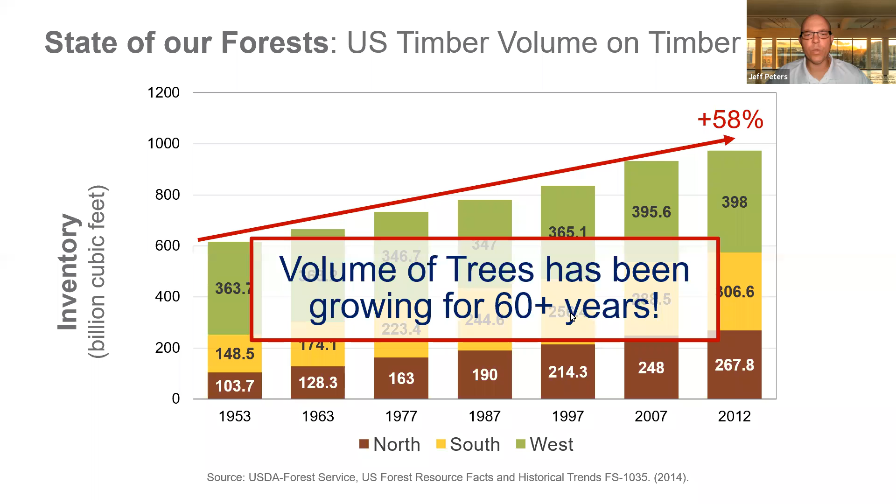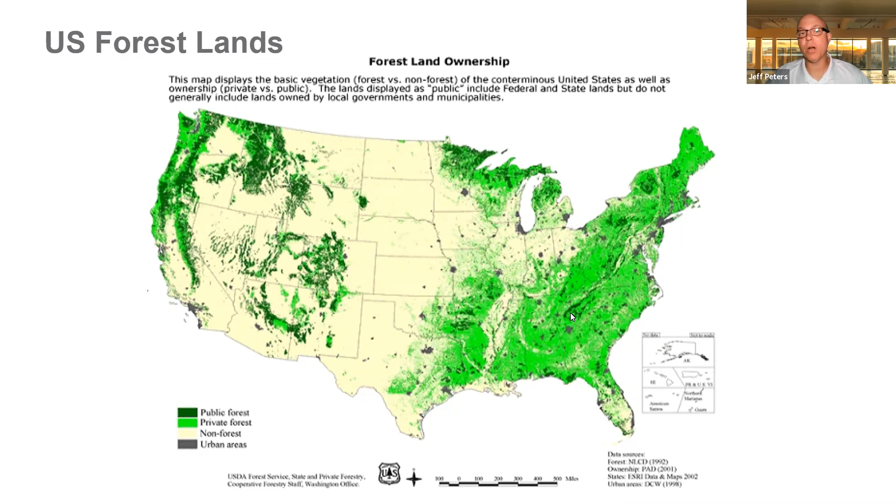Taking a closer look at the previous slide, private land ownership accounts for about 56% of our total forest land. Out of that 56%, there are more than 10 million individuals and family forest landowners that make up 42% of the total privately owned forest land. The other 14% of privately owned forest land is owned by corporations or partnerships and tribes.

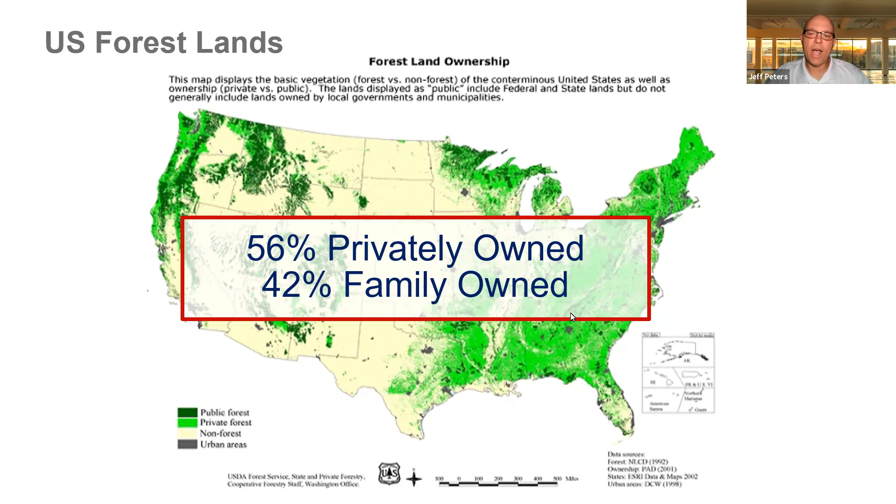So what motivates these private landowners to keep forests on their land? What is really motivating them to do that? It's really very simple and clear: the economic value of forest products is certainly a major factor to many of these private landowners. The more economic incentive that we can create for sustainable forestry, the better.

There is this saying in the world of timber: a forest that pays is a forest that stays. I understand that may be an oversimplification of what is really happening, but it really does illustrate the simple truth: a forest's survival really depends, in most cases, on its value to the local community and the landowner.

I want to take this opportunity to clear up a very common misunderstanding about forestry. There is a tremendous misconception that when a landowner decides to cut several acres of forest land to harvest trees they've been growing and managing for the last 12 or 15 years, people start to believe that's considered deforestation, because you're cutting down all the trees. That really couldn't be further from the truth.

So to better understand it, let's first define it. Deforestation is really the permanent removal of forests where the land is converted to other uses. The key term there is it's permanent—that's when we have deforestation, when the land has been repurposed for something else and there's no intent ever of regrowing any type of timber on that land.

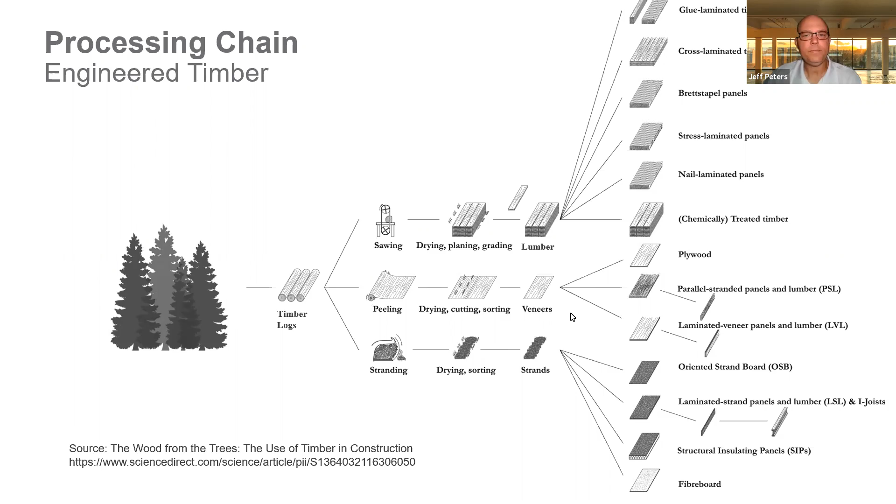And remember, all these wood products have carbon stored in them for their lifetime.

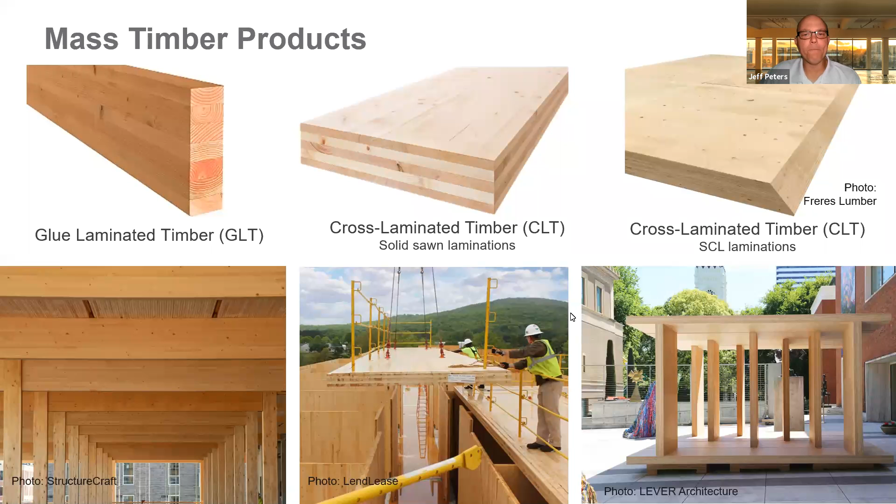Let's review some of the most common mass timber products. I'm going to be talking quite a bit about mass timber today, so I'll spend some time explaining these products. If you've seen some of the other presentations WoodWorks has done, this slide and the next two will be familiar to you. But these really just give you an idea about the volume of timber and the applications in which they can be used.

Of course, GLT or glue laminated timber, glue lams, are some of our most common, oldest traditional engineered wood products, used for post and beam frame structures.

Then we move on to cross laminated timber, or CLT, which particularly highlights solid sawn lumber. The image right next to it is a structural composite CLT—they use structural composite laminations or wood veneers to make mass plywood panels. The two are very similar; the only difference is one uses dimensional lumber and one uses veneers.

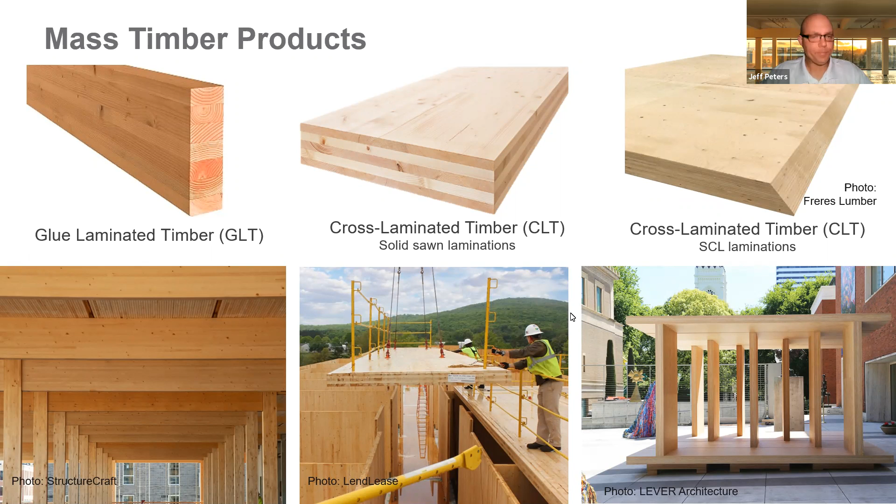Moving on, we have dowel laminated timber, or DLT. That one uses dimensional lumber, a softwood base material, and a hardwood dowel that's drilled through and injected into the base material. That hardwood dowel has a moisture concentration lower than the base material, and over time it wicks moisture from the base material, expands, and mechanically locks everything into place.

So you have a completely green product—pretty impressive. Nail laminated timber, or NLT, uses just dimensional lumber face-nailed to each other to create large panel products. And lastly, heavy timber lumber decking works really well in a mass timber or even just a heavy timber project. There could be opportunities where lumber decking is chosen over a mass plywood panel or CLT panel, and it still provides a beautiful aesthetic to your building.

So lumber decking is another option you can consider as well, if for some reason CLT, DLT, or NLT is not the right product for your project.

Here we see large prefabricated mass timber panels being lifted and set into place with a very small construction crew. These panels range from 8 to 11 feet in width and up to 40 to 60 feet in length. It really is a function of what manufacturer you choose—they all have different fabrication capacities. With advancements in fastener technology, these panels can be lifted into place and secured quickly with long self-tapping screws, very, very fast.

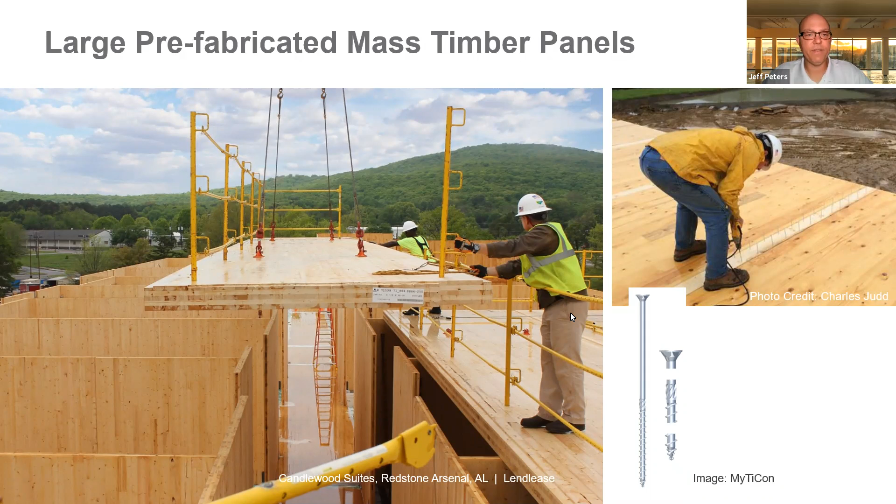These mass timber structures will store carbon for their lifetime in the building, and longer if the wood is reused at the end of the building's life cycle, which we typically see happen with timber. So these mass timber products could be in buildings for 50, 60, 70 years or longer, and then potentially be repurposed for something else afterward. You can see that it locks in that carbon for that entire time—really impressive.

Advancements in mass timber technology will allow us to go taller now. We can have taller wood buildings up to 18 stories in height with the 2021 IBC. With the evolution of tall wood building codes, a sizable market has become available for timber, especially for buildings in the 7 to 18 story range, which have traditionally been constructed with steel or concrete. We now have the option to use mass timber on these buildings moving forward.

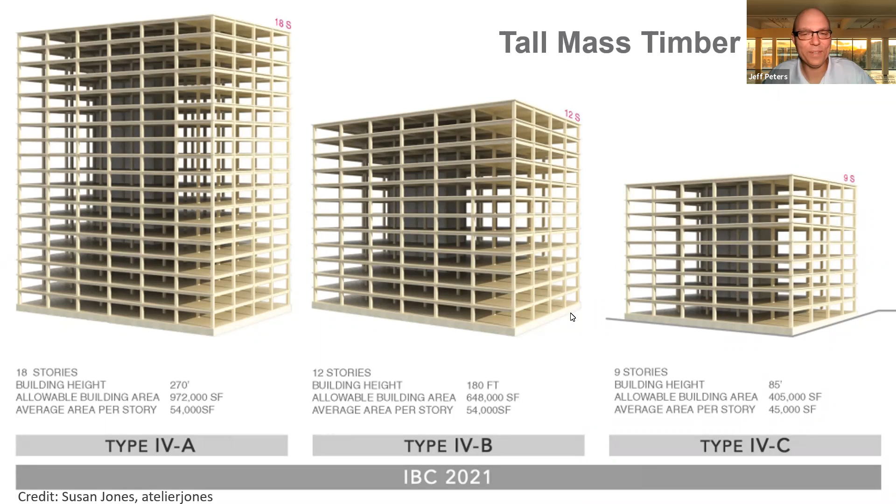Since regenerative resources is one of the principles of a circular economy, today we'll focus on the raw materials being fed into that loop.

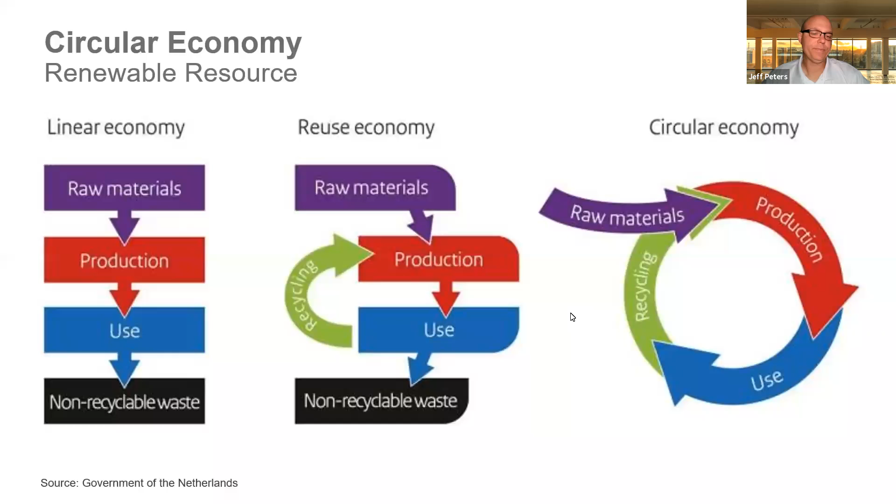So jobs really are a key component to this circular economy that we're presenting here. Utilizing wood products in construction can help support regional jobs and reinvigorate rural communities in the US as well.

In 2018, the wood products industry supported 434,900 jobs in the US with a payroll of about $21 billion. That's a pretty serious economic impact.

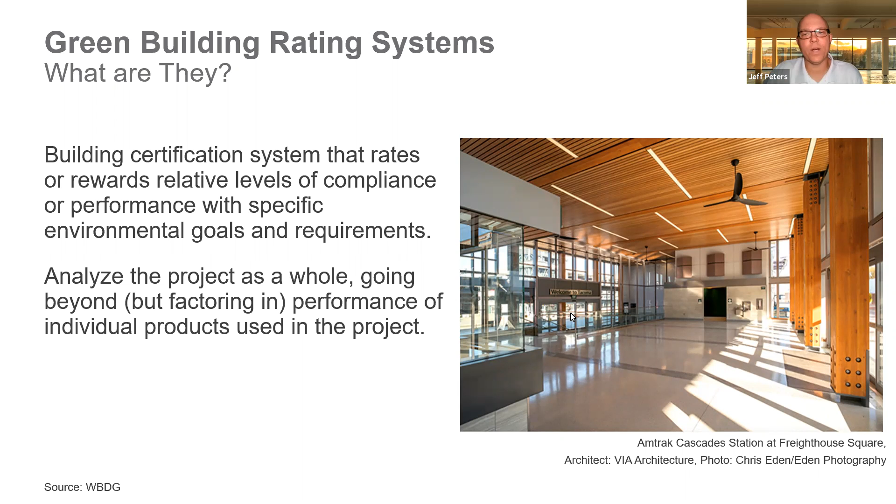Rating systems are a type of building certification system that rates or rewards relative levels of compliance or performance with specific environmental goals and requirements. Although new technologies are consistently being developed to complement current practices in creating greener structures, the main goal of green building is to reduce the overall impact on our built environment, on human health, and on the natural environment.

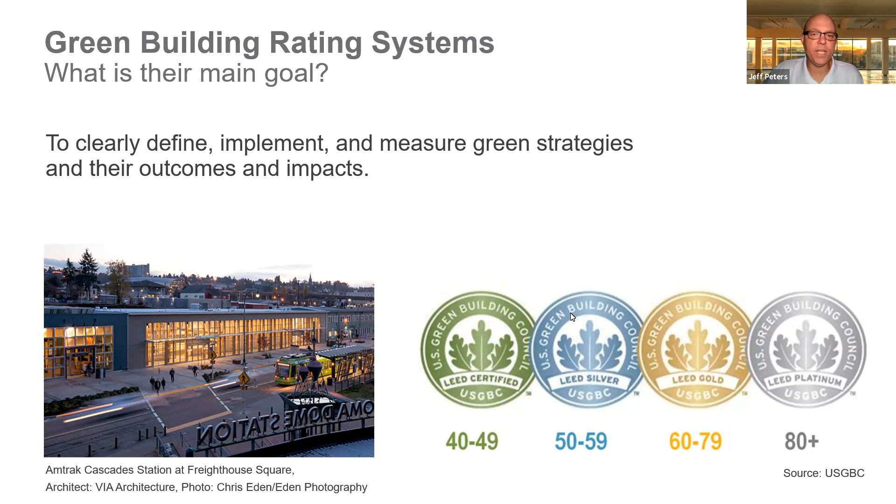We do that by efficiently using energy, water, and other resources. Green building rating systems measure multiple different categories like planning and design, energy efficiency, water efficiency and conservation, material conservation, and resource efficiency, just to name a few. The idea is to make these buildings more sustainable as well as improving building performance and efficiency overall.

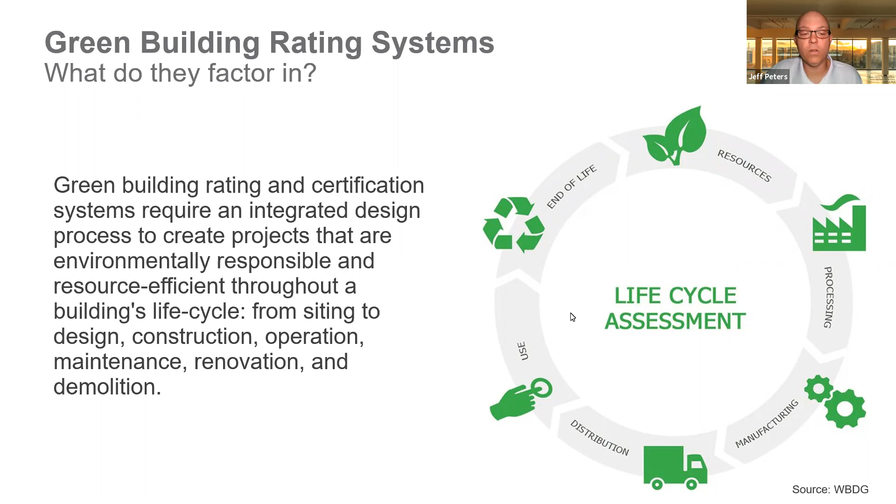The reasons for pursuing a green building certification for a project are really varied. Certification through any rating system provides verification of the green nature of the project, and it can be a valuable educational and marketing tool for owners as well as design and construction teams through the process of creating a more sustainable building. Green building certification can also be a way to provide an incentive for clients, owners, designers, and users to develop and promote highly sustainable construction practices.

It's important to note that a building does not have to be certified to be sustainable and well built. I just want to make sure I point that out. We've all designed several buildings that are extremely sustainable and well built, and they don't have any type of green building certification attached to them. We all recognize that that doesn't have to happen in order for a building to be sustainable and built well.

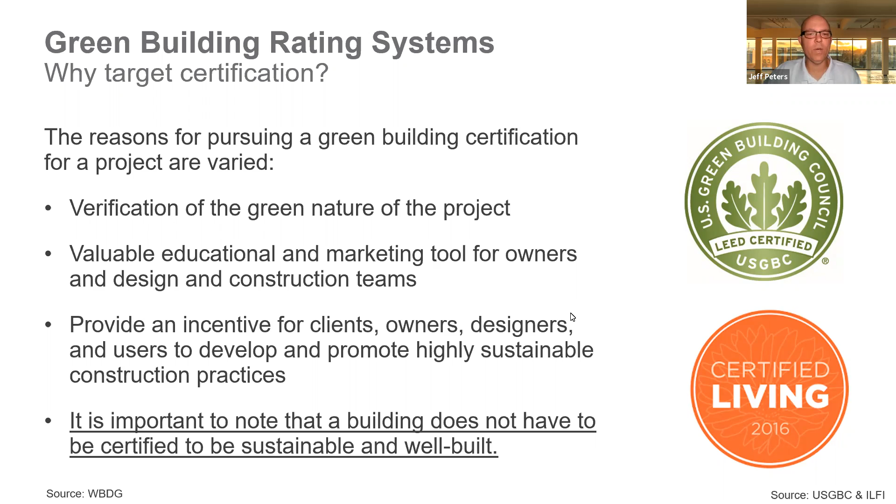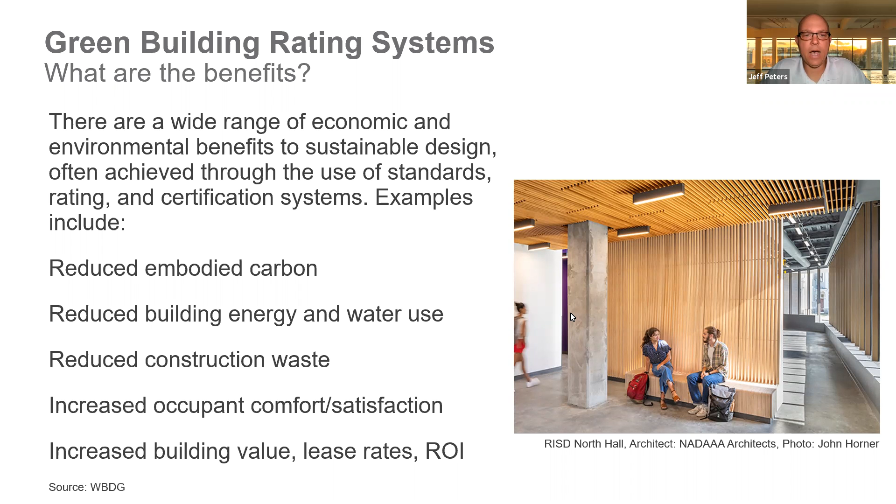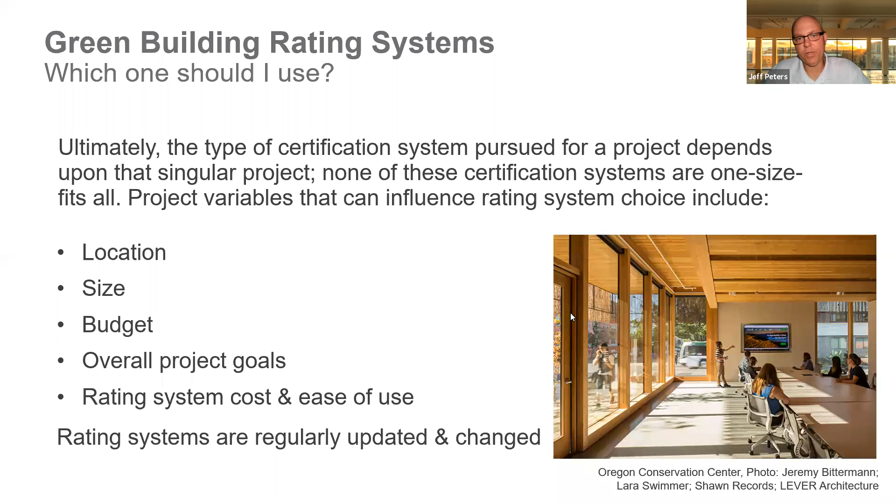Ultimately, the type of certification system pursued for a particular project really depends upon that individual project. None of these certification systems are a one size fits all type system. There are multiple project variables that can influence the choice you make, and those variables can be things like location, size, budget, and even overall project goals.

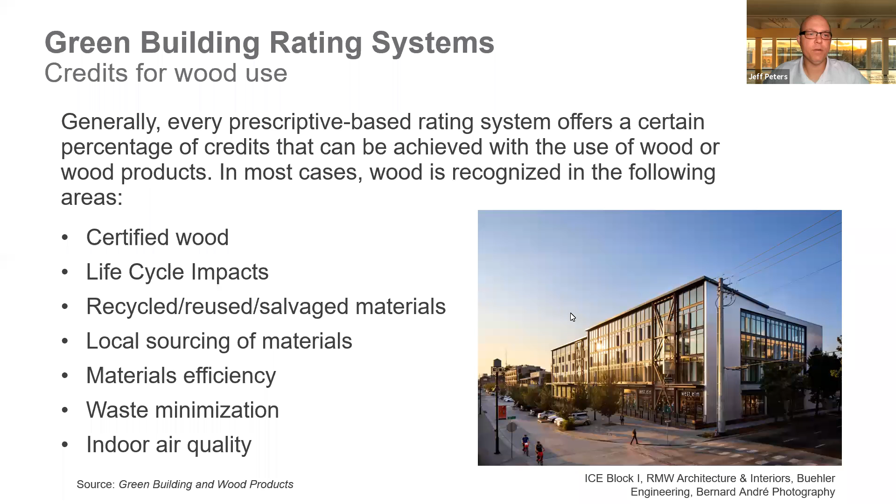Generally, every prescriptive based rating system offers a certain percentage of credits that can be achieved using wood products. In most cases, wood is recognized in areas such as certified wood, life cycle impacts, material efficiency, and waste minimization. Those are just a couple to share and point out. There are a couple others on this slide as well.

Credits are awarded for wood that has been third-party certified as coming from a sustainably managed forest. There are different rating systems that allow for different certification programs as well, with some more inclusive than others. So be aware of that.

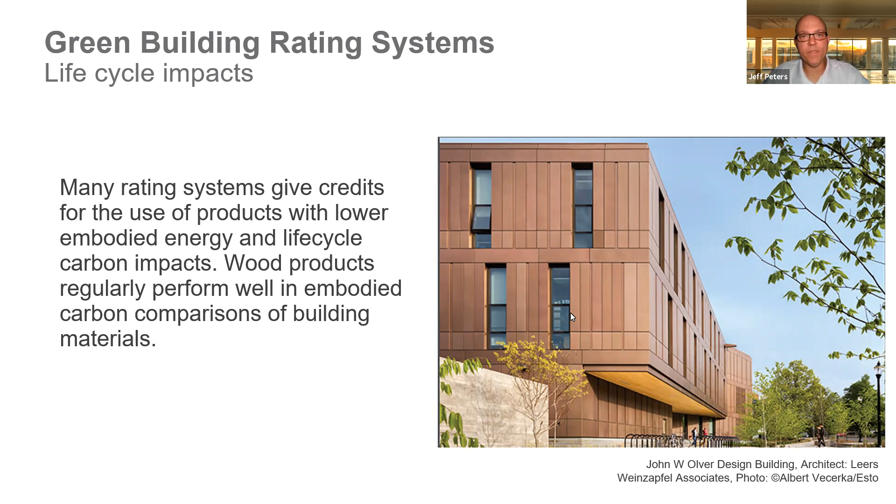Many rating systems give credits for the use of products with lower embodied energy and life cycle carbon impacts as well. Wood products regularly perform well in embodied carbon comparisons of building materials, so really taking advantage of the embodied carbon that wood has is something strongly to consider.

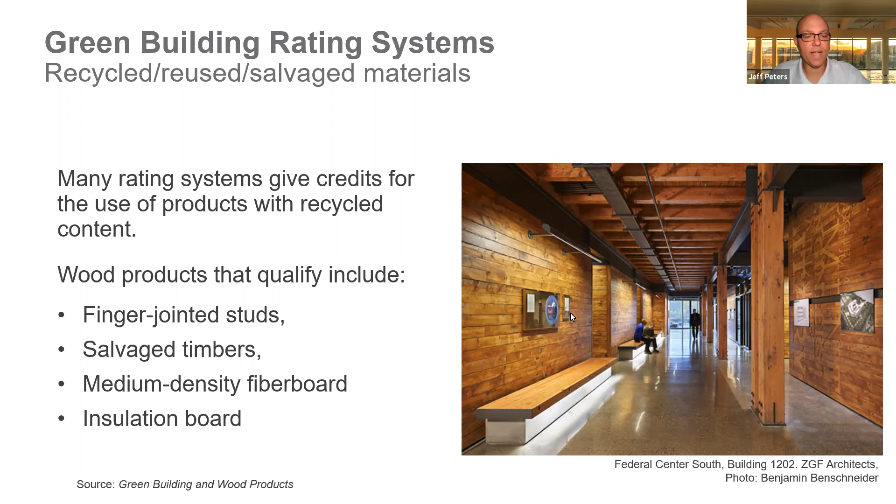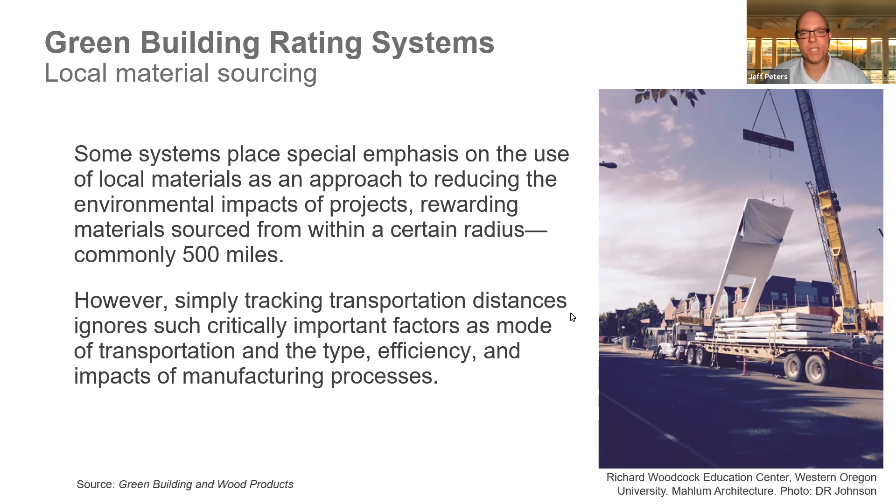Some systems place a special emphasis on the use of local materials as an approach to reducing environmental impacts on the project. So rewarding for material sourced from within a certain radius, say commonly about 500 miles, that's a common radius in which if you're sourcing materials within that particular radius, you can get points for that as well.

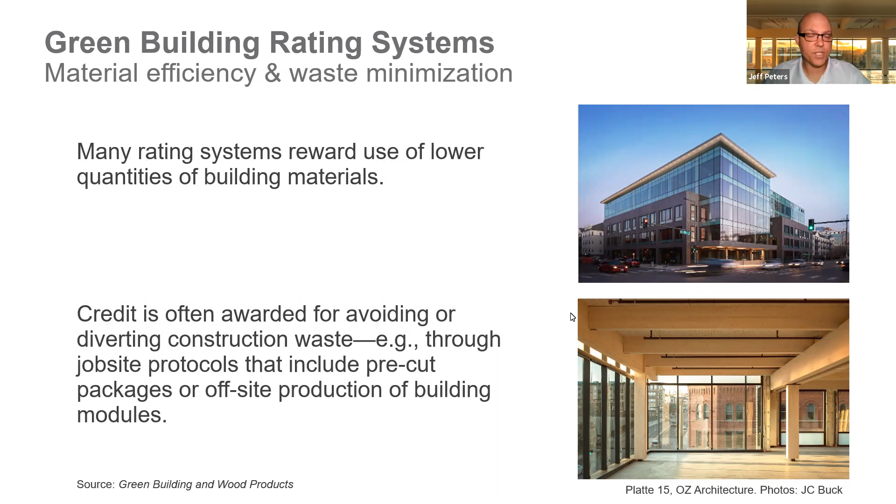Many rating systems reward use of lower quantities of building materials as well, as credit is often awarded for avoiding or diverting construction waste through job site protocols. So if you're able to reduce the amount of waste, you can get points for that as well.

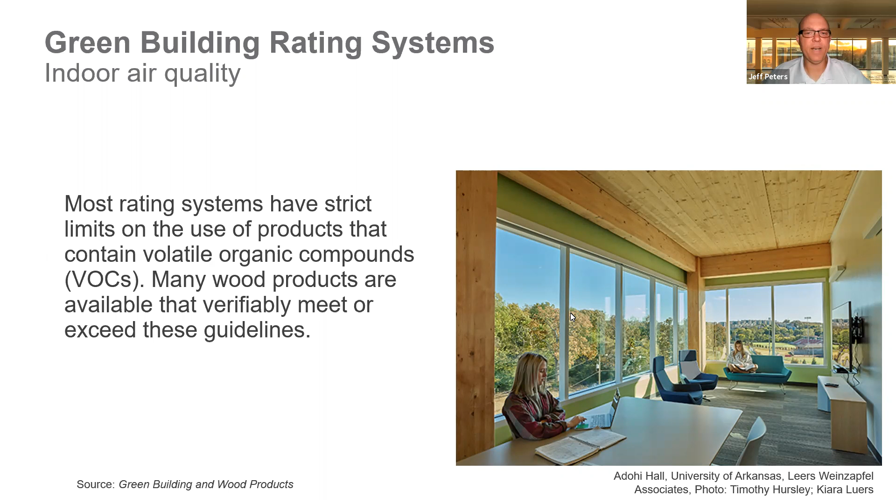Most rating systems have strict limits on the use of products that contain VOCs, or volatile organic compounds. Many wood products are available that verifiably meet and or exceed those guidelines and requirements.

There are other ancillary benefits and advantages of wood to consider. Obviously, acoustical advantages for sound abatement, that's a really great opportunity to use wood products. I'd encourage you to check out the woodworks.org website. We have a fantastic paper on acoustics specifically related to mass timber buildings, so I'd encourage you to check that out as well.

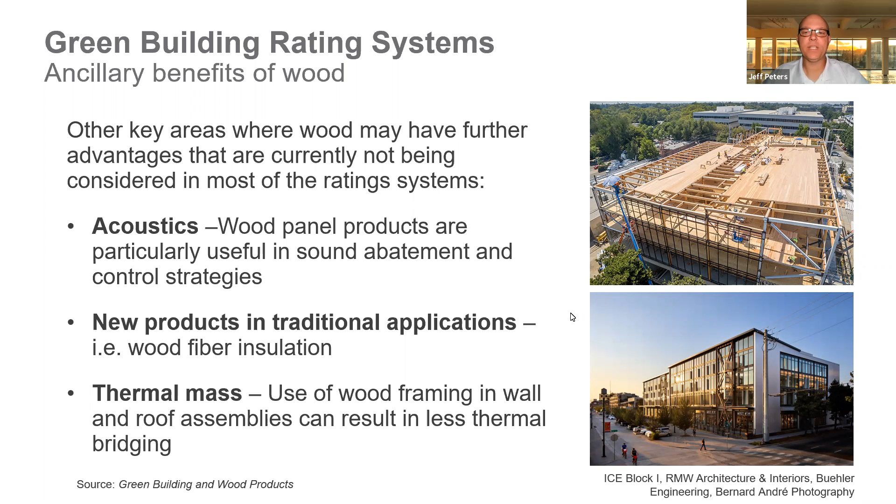New products used in traditional ways, so say for example using wood fiber insulation. We've been using insulation for decades, but now using wood fibers to help us with insulation. The use of wood framing in wall and roof assemblies can result in less thermal bridging as well. When you stop to think about it, wood is a very poor conductor of heat, so that drastically reduces the amount of thermal bridging in our buildings.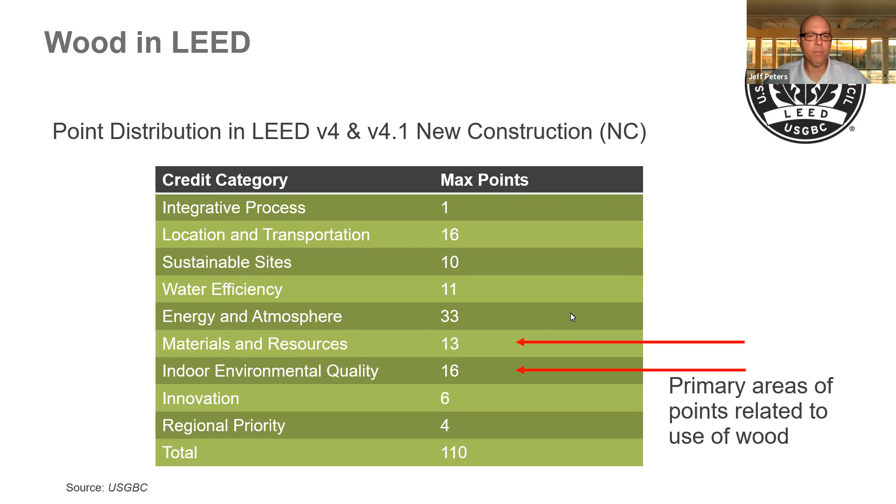When looking at wood in a LEED rating system, you'll find that the most opportunity to capture points for wood materials is in the materials and resources category, as well as the indoor environmental quality category. Those are our two primary areas where we can get points related to the use of wood on a particular project. The use of wood products can contribute up to 12 points, accounting for more than 10% of LEED version 4's total credits. According to the USGBC, wood is the most highly incentivized strategy for LEED. So really important to take a look at that.

In LEED version 4 and 4.1, wood products qualify for credits in 5 different categories. We have building life cycle impact reduction. Wood does well here due to its really low environmental impact.

We have the building product disclosure and optimization. So many wood environmental product declarations are available for that as well. So looking into that a little bit further, the building product disclosure and optimization, you can source the raw material from sustainably managed sources. So there's opportunities for points in both of those.

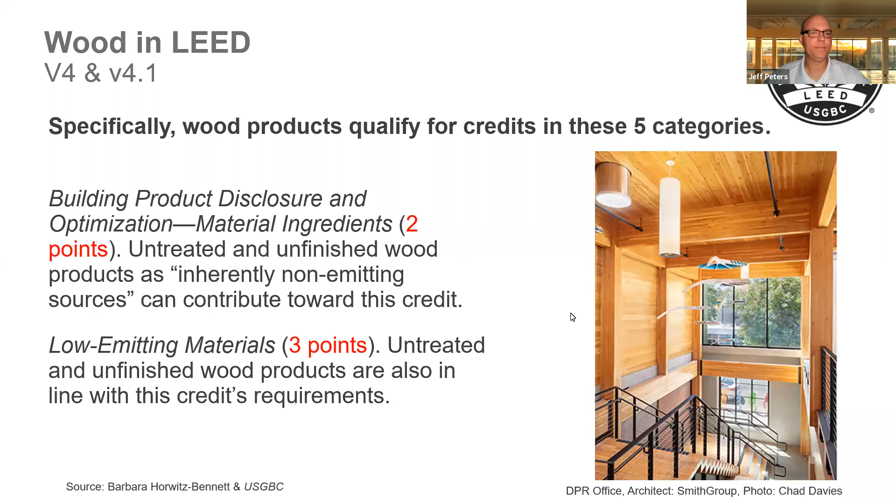So let's discuss a little bit more where some of your LEED points can come from. So 1 point in sourcing of raw material can be obtained by using the Certified Wood Pilot Credit, an alternative compliance path or ACP. The pilot credit aims to really help eliminate illegally sourced wood from the supply chain. So making sure that you're getting material to your site that is sustainably sourced, you're able to receive a point for that.

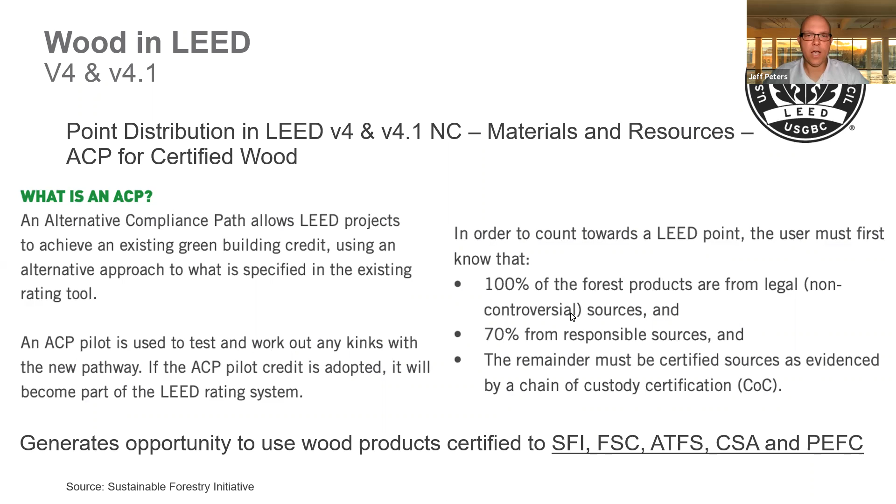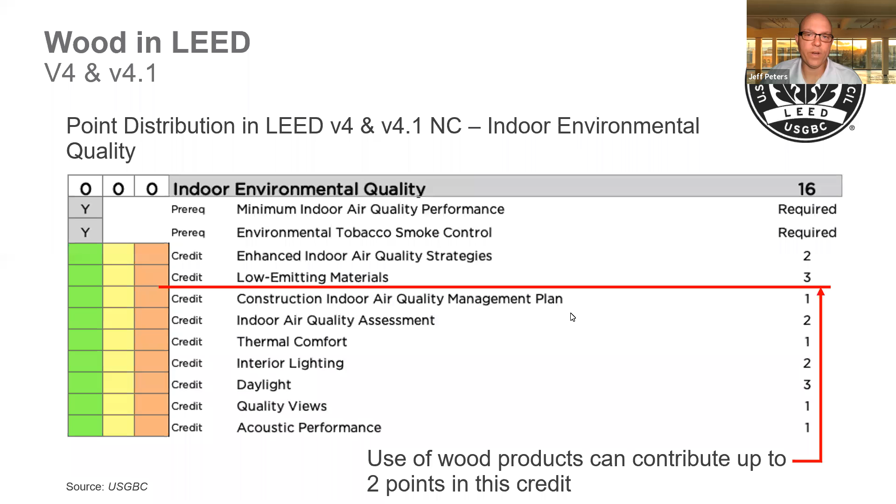And an alternative compliance path, what does that mean? So that allows LEED projects to achieve an existing green building credit using an alternative path approach. So this alternative approach now allows you to use wood that comes from forests certified to SFI, FSC, ATFS, CSA, and PEFC standards. So this opens the door and allows other certification programs to be used in LEED to gain points. You can obtain up to 2 points in the low emitting materials category for the use of wood products. So that covers the little bit that we'll touch on LEED.

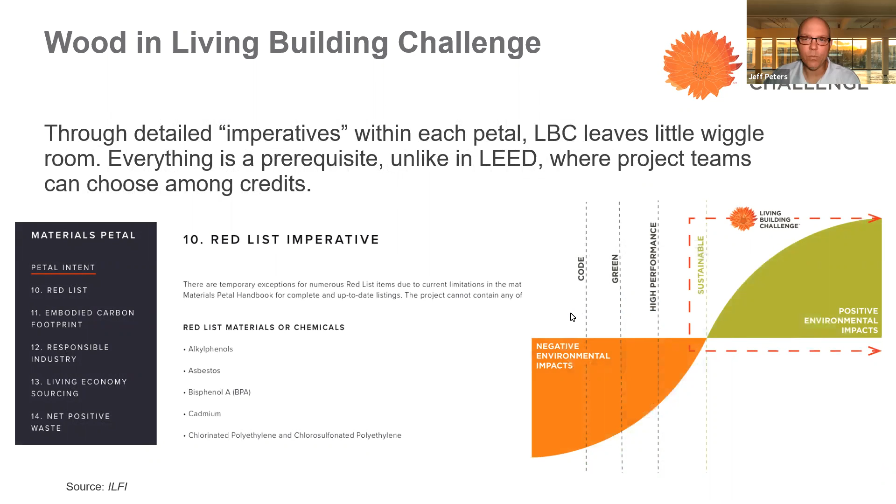Now jumping into the Living Building Challenge, or the LBC, it is widely considered probably the most stringent green building standard in the world. It really does attempt to emulate a flower by encouraging net zero or even net positive impact on virtually everything the built environment touches. So its requirements are categorized under 7 petals: place, water, energy, health, materials, equity, and beauty. So through detailed imperatives within each petal, the Living Building Challenge leaves little wiggle room, honestly. Everything is a prerequisite, unlike LEED, where project teams can choose among credits.

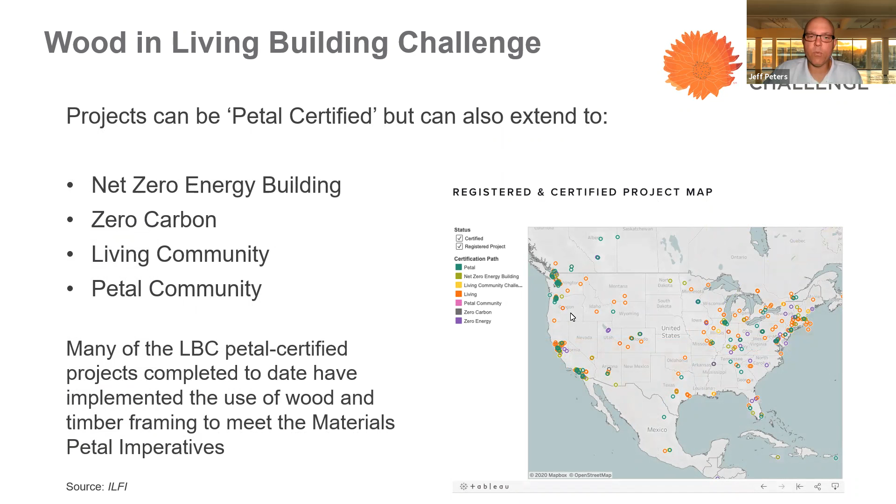Projects can be petal certified, but can also extend to net zero energy building, zero carbon, living community, or even petal community. Many of the Living Building Challenge petal certified projects completed to date have implemented the use of wood and timber framing to meet the materials petal imperatives as well. So, specifying wood can definitely help you meet that materials petal imperative.

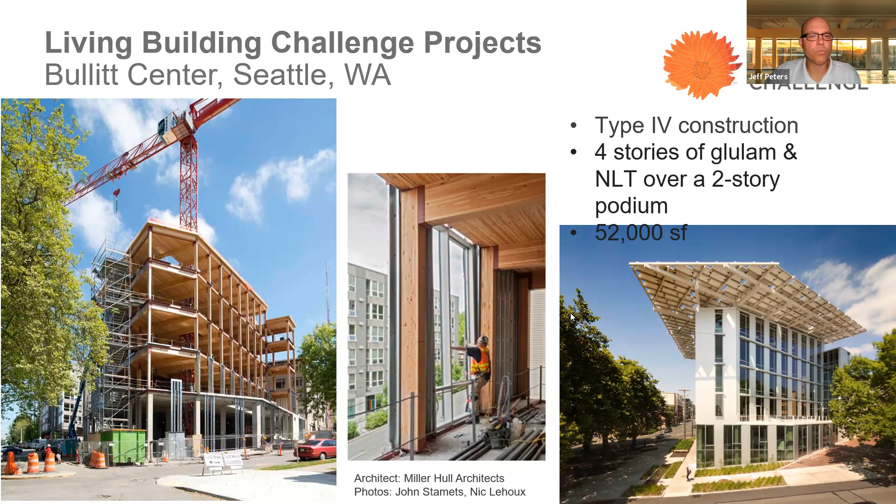So here's an example of a Living Building Challenge project, the Bullitt Center in Seattle, Washington. The Bullitt Center is a 4-story glulam post and beam structure with a nail laminated timber floor on top of a 2-story concrete podium. So really just a gorgeous, gorgeous building. This 52,000 square foot building has a 250-year life expectancy and is the first Living Building Challenge certified office building. I would encourage you to check this one out.

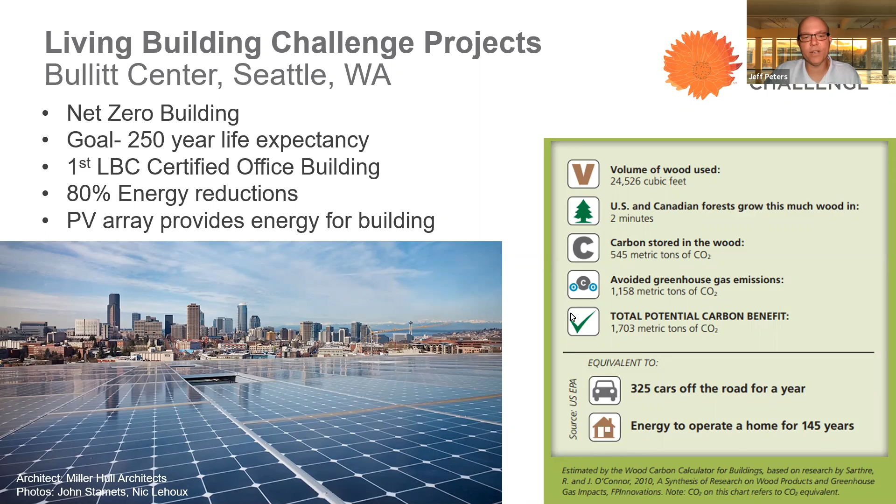Another beautiful Living Building Challenge building is the R.W. Kern Center in Amherst, Massachusetts. Here you'll find a beautiful 17,000 square foot glulam post and beam frame with heavy timber tongue and groove decking. And this building is self-sustaining. It generates its own energy, it captures its own water, and processes its own waste.

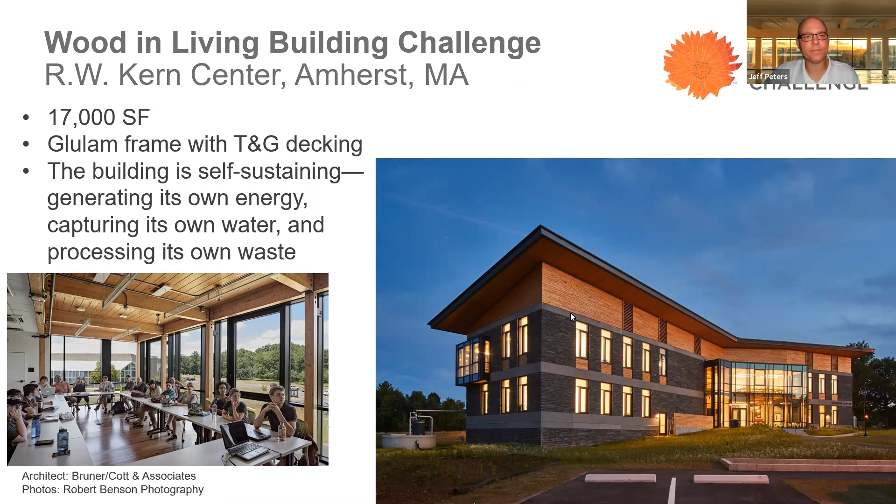One of the frequent questions we hear is, what life cycle assessment tools are available? We're not going to jump heavily into this, but point you in the right direction. We have an Ask the Expert that comes out on a regular basis, and we did an expert tip on this that discusses the various software tools available for calculating items like embodied carbon or upfront greenhouse gas emissions.

You can download the tools from the link on this slide. I won't be spending any time digging into the detail of these, but I really just wanted to point you in the right direction. Then you can spend some time reading over the expert tip that we published and learn about the different tools that are available.

I will touch on some of the tools really quick. In the US, two of the most common and robust whole building LCA tools are the Athena Impact Estimator for Buildings, a standalone tool that uses Athena's own highly regionalized database for the US and Canada, and Tally, which is a Revit software plugin that relies on the international GaBi database. So those are the two big primary ones.

One Click LCA is primarily used in Europe, but it is expanding into the US. One Click LCA is based on environmental product declaration, or EPD, data. Some experts believe, though, it's not well suited for LCAs due to the inconsistencies between product categories. One Click LCA is part of a suite of products that incorporates life cycle costing and the circular economy analysis that we discussed earlier.

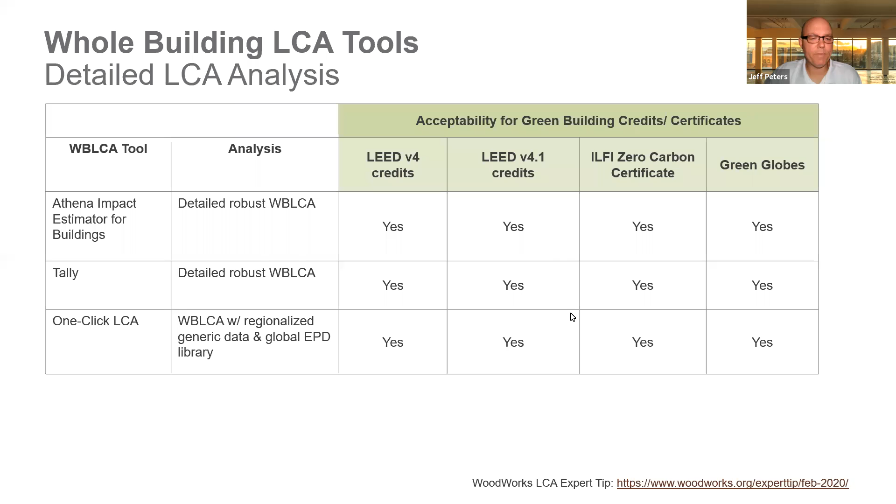Finally, let's jump into some discussion on biophilic design. Biophilia refers to the idea that humans possess an innate tendency to seek connections with nature and other forms of life. People now spend about 90% of their time inside buildings, whereas humans originally spent all of their time outside in nature. In these times of quarantine, we spend even more time inside and realize the importance of connecting with nature and natural systems.

Simply put, biophilia is the human's natural response to being out in nature. What do we feel when we're in that natural environment, in the forest, in the trees? Here's a great chart. Terrapin Bright Green is an expert in biophilia, and they've written several reports on it. This is a portion from Terrapin's table on the 14 patterns of biophilic design, which summarizes each biophilic pattern and the biological responses we experience. We won't get into all of them, but want to share some so that we can maybe start helping you think in a different way.

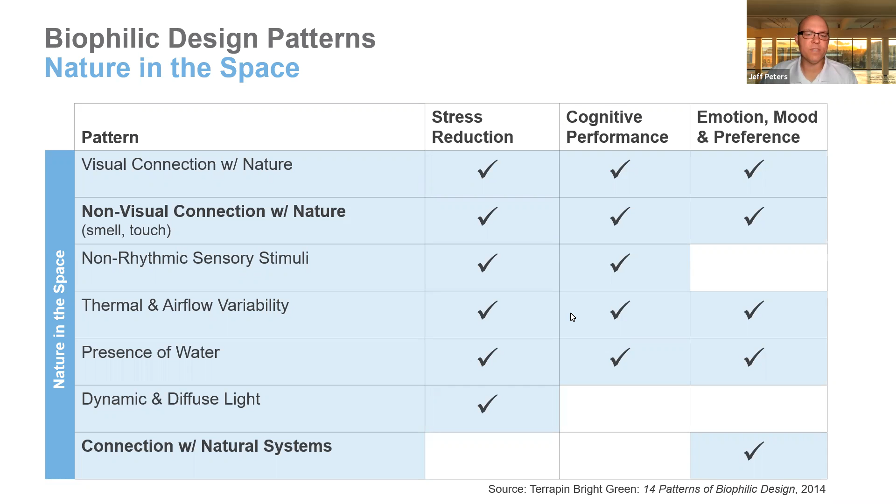The last pattern, connection with natural systems, is another interesting one for wood. Wood equals timber, which equals trees, which equals forests, which equals nature. So kind of a convoluted path to get there, but just ways to think about this biophilic response that we're having when we're in a timber building.

This next slide includes those same nature in the space patterns of biophilia and considers how wood might contribute to each pattern. So research around biophilic benefits of exposing wood indoors is still relatively early, and more research needs to be done. There's a growing body of research that is starting to suggest that wood may very well be good for our health and well-being when incorporated into our built environment. We kind of already know this, but there's a significant amount of additional research being done to really start to unlock the benefits.

Let me jump into the second pattern, non-visual connection with nature. Let's imagine walking into the office in the morning and it smells like a forest. You can smell the natural wood material that was used to build this building. The pattern of wood grain really is something humans have been attracted to for ages, right? We can all think of that time where we were touching some particular wood grain pattern or table or some type of other furnishings, right?

Now when we have prospective tenants tour mass timber buildings, they can also smell and touch the feeling of those wood columns and that structure. They smell it, they can touch it, and they're just connected to it. The last pattern would be connection with natural systems. I think we've seen tech and other corporate companies use exposed wood in their offices to brand their values and show their commitment to the environment and our future.

So a couple other areas to look at. This chart covers the natural analogues patterns in brown and the nature of the space patterns in yellow. So material connection with nature is easy for us in the wood world to imagine, right? Wood is really the only renewable, bio-based, natural structural material we have to build from. Wood, it's in the trees, right?

So complexity and order is another interesting pattern I'd like to talk about. We'll see examples of how wood has been used in complex architectural works, but the wood grain might also contribute to this pattern as well. When we see a wood grain pattern, it's authentic and it's a story of that piece of material's life. Our purchasing of wooden tables and bowls has shown us that we're attracted to these imperfections in the wood and their natural signs of life, variations in color, luster, texture, and even grain pattern.

So we see tree rings and we can start to understand the story of that tree. We see rainy seasons, we see dry seasons. Sometimes we even see scars from forest fires. So really, when you take a step back and really look at these materials, there's a lot to be told about the story of where they've come from.

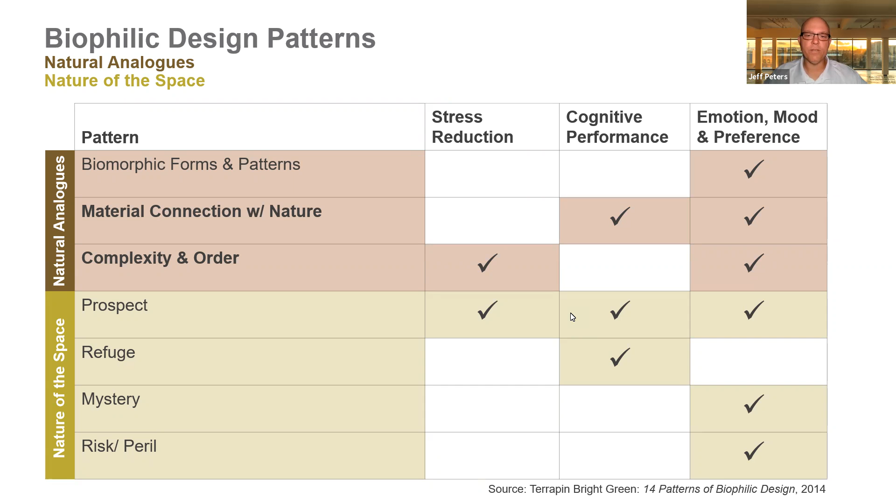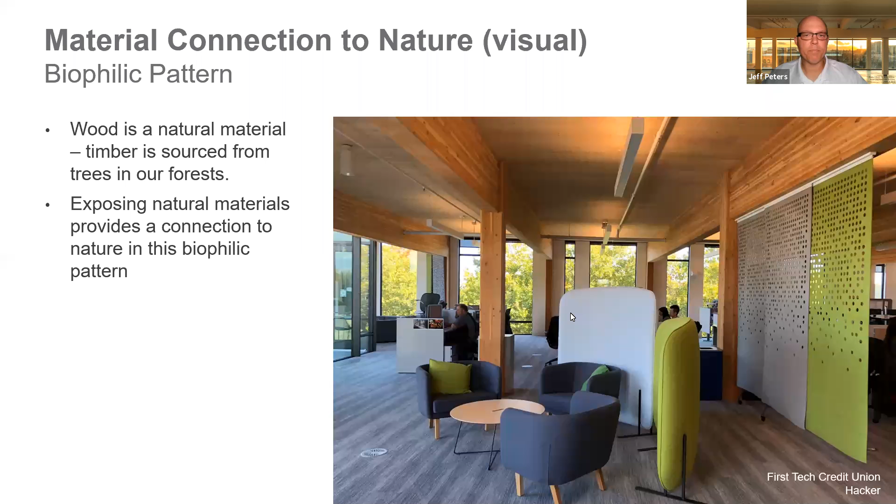Let's talk about just this biophilic pattern, right? This is an example of the interior of the First Tech Credit Union. The exposed wood material really does provide a visual connection with nature, which again can help lower blood pressure and improve attentiveness and mental engagement, increase your overall happiness as well, and hopefully result in better performance in the built environment.

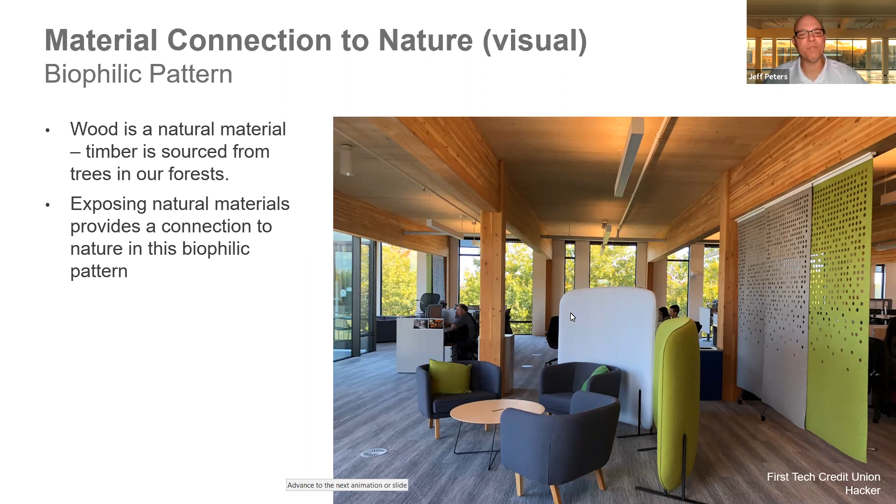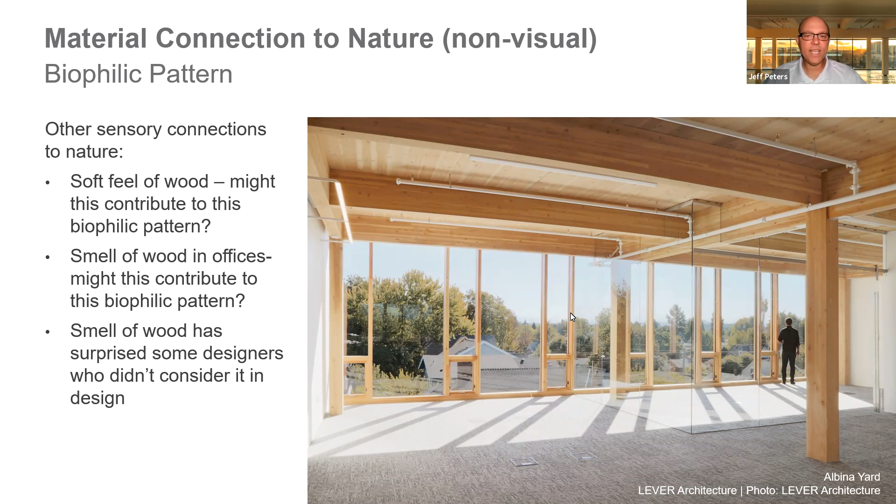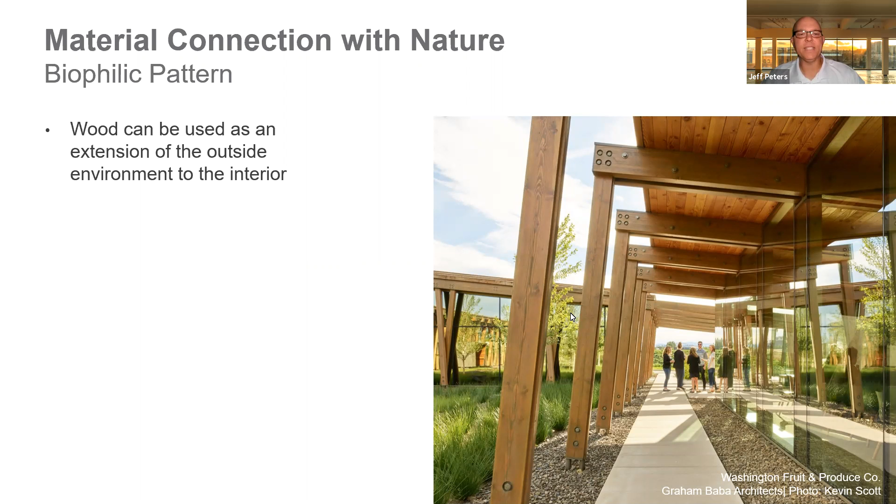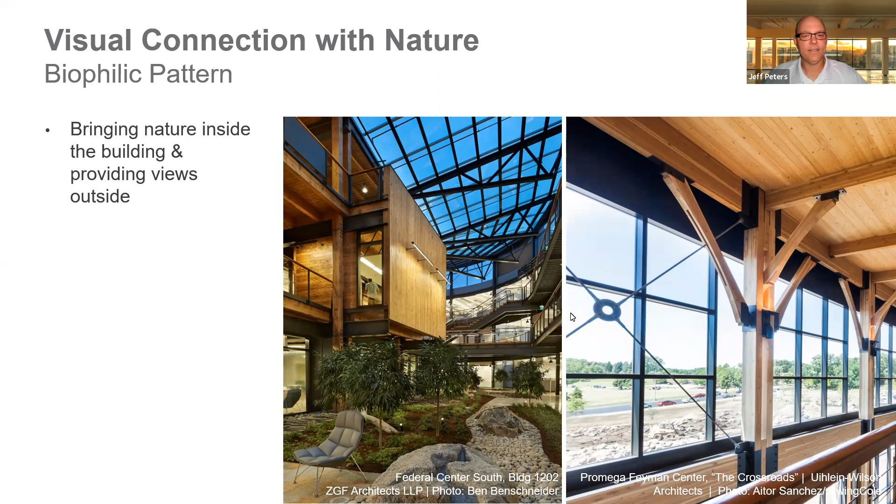Visual preferencing of the complexity and order pattern really reinforces that people are happier with an enhanced ability to think and learn. If we really look at how our senses can be stimulated in these images here, I mean, just the geometry and the use of the material in these buildings are absolutely stunning.

And let's spend our last few moments together looking at a biophilic design of an office building. In Australia, they did a report titled Wellness and Wood Equals Productivity.

This report surveyed 1,000 typical Australian workers inside their buildings. They found that those in workplaces with a higher proportion of visible wood feel more connected to nature and rate their working environment far more positively. So wood in the workplace really is associated with higher productivity and reduced sick leave, which translates into more profit for business owners.

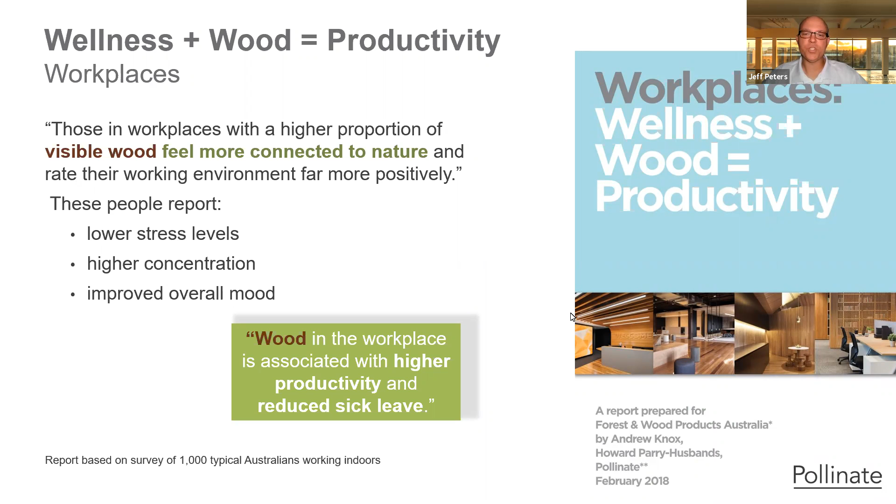When we talk about costing comparisons, I talk about looking at the building holistically and not just material. So some of those cost considerations when you're doing a timber building would be ceiling treatments. Is the mass timber structure serving as the structure, the fireproofing, the fire protection, and the finish? Because if that's the case, then it has three functions, which is very different from what a steel structure can function as in a building of similar size.

So are we talking about what types of floor topping, HVAC, mechanical systems, foundation size, soil remediation, groundwork improvements - all of those things can impact the cost of the building. All of these contribute to the potential cost savings of a mass timber project that we tend to miss when we only look at the per-square-foot cost, when you're looking at the material cost of steel versus concrete or wood, and not a holistic building approach.

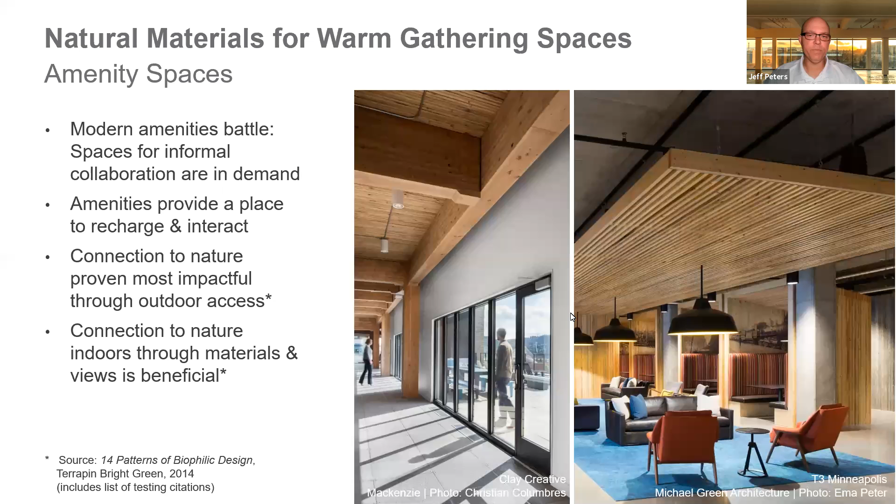Here are some beautiful images of the gathering spaces for Clay Creative on the left and T3 Minneapolis on the right. I really like you to look at how these spaces provide opportunities for individuals to recharge or even interact with clients, as well as spaces that connect you to nature through direct outdoor access and an indoor connection through materials and views. Just really beautiful.

Research has shown that comfortable and enjoyable working environments really does help retain employees. So consider the cost associated with employee turnover - it's estimated to cost you somewhere about $25,000 when somebody leaves a company.

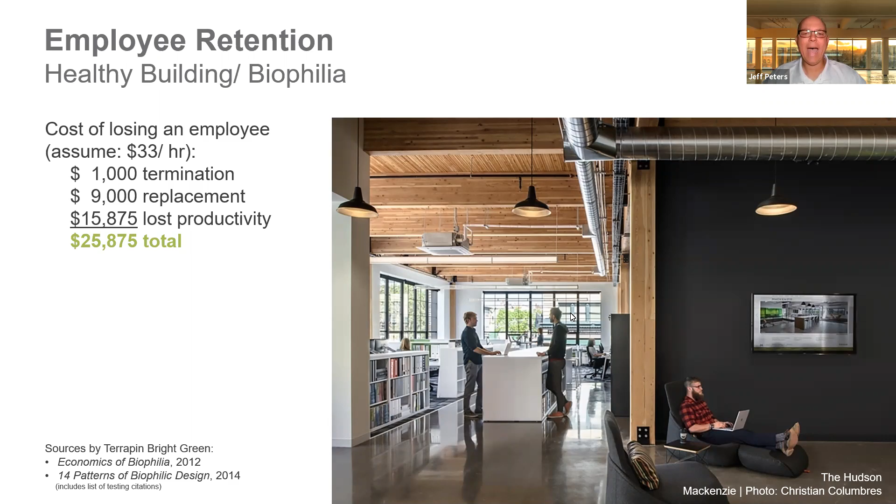So think about extending a working environment to an individual that is beautiful. You're creating a healthy building, an environment where they want to be. They're going to be more productive, which can really help reduce the amount of turnover you have when employees are happy in their working environments.

Millennials, as we're wrapping up here, are estimated to be 50% of the workforce by 2020 - they were already 50% of the workforce, and they care about their office space, creating a demand for mass timber. This generation really does care about the environment, and they want their employers to share those values as well.

Wood buildings have a very low carbon footprint, and they provide a means for a circular, renewable economy. Timber interiors provide a hip and healthy atmosphere for employees of these tech companies who are not only advancing sustainability, but also healthy building practices.

Exposing mass timber helps to brand the corporate culture through the architecture. Millennials love it for the commitment to innovation and the environment, and it's a cool and hip place to work as well. And if you want to compete with the big tech companies, don't forget the craft coffee - it really rates high for what millennials desire in their work environments.

The last thought I'd like to leave you with today is that wood really is a renewable and responsible choice, and WoodWorks is here to help you make the choice to use wood on your next project.